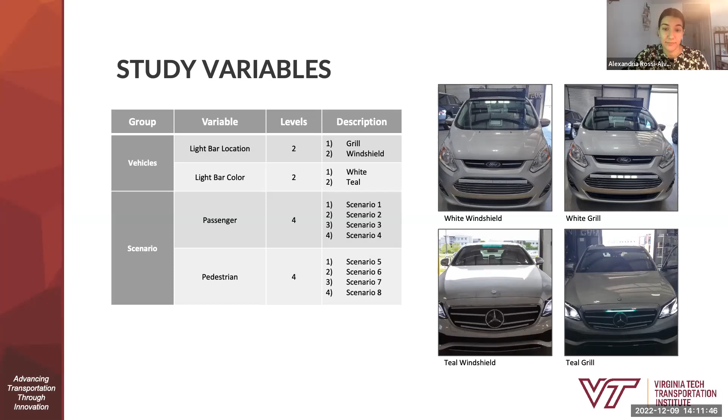So the study was conducted at the Smart Roads at VTTI. This is a closed test track research facility created in partnership with VTTI and VDOT. VTTI launched the Virginia Smart Roads, a suite of test tracks that enable advanced vehicle testing in a really comprehensive cross section of roadways. There are 4 major sections for the Smart Roads, which include a live roadway connector, the surface street, the highway, and the rural section.

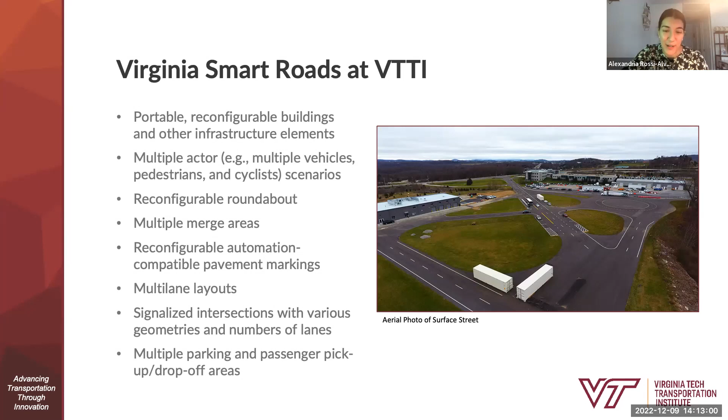We did a lot of training before we began collecting data, and we ran multiple pilots to ensure that the drivers were driving robotically and uniformly, practicing all of the testing scenarios that we were evaluating.

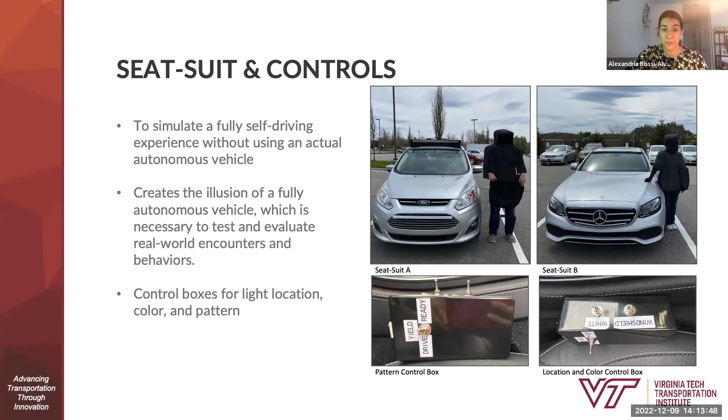We tested 3 light patterns that conveyed vehicle intention to the pedestrian.

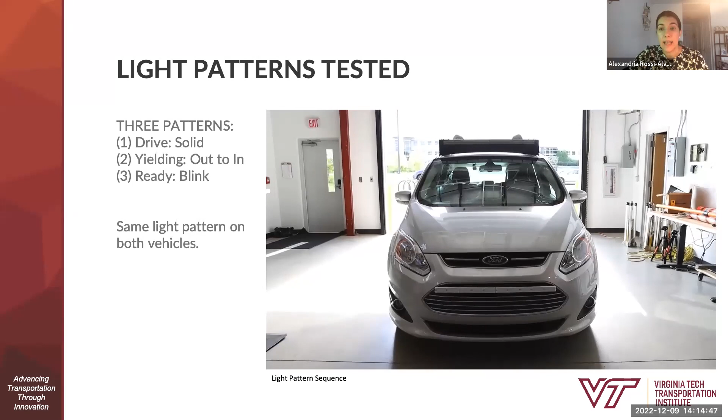So here, the vehicle is actively driving down the roadway. The out-to-in means the vehicle is actively braking or yielding. And the blink indicates that the vehicle was about to start driving again - it was ready.

Per the Virginia Tech IRB and VTTI Safety Committee, we could not have participants actually cross the street in front of the moving vehicles. So we utilized what we call our decision box. We set up a box outlined on the corner of the intersection, participants stood outside the box, and the moderator provided instructions.

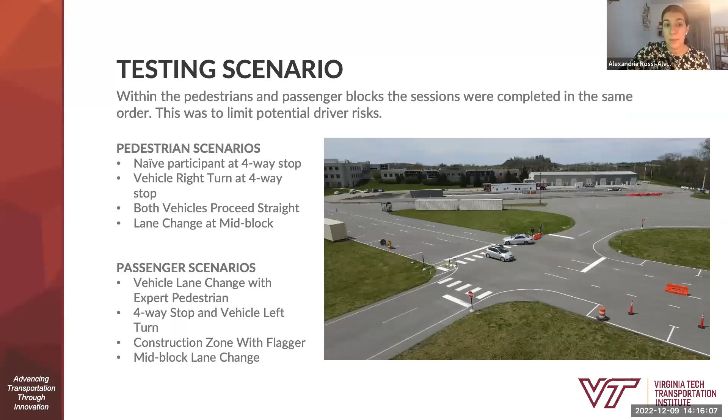We had 8 different testing scenarios. The first 4 were pedestrian scenarios, and the last 4 were passenger scenarios. The scenario groupings were counterbalanced to mitigate any order effects. I'm going to go through each scenario individually.

Our first scenario was a four-way stop where both vehicles came to the stop. Vehicle B approached the intersection first. Once the vehicles stopped, vehicle B proceeded straight through the intersection, then vehicle A. The vehicles did follow all normal traffic laws that are on the roadway today, and participants were instructed that the vehicles would follow normal traffic laws.

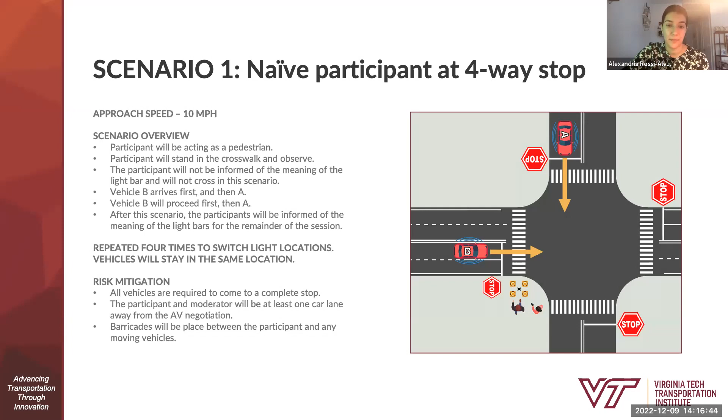Scenario 2 is our right-hand turn scenario, where the participant is on the other side of the road. Vehicle B is wrapping around and will make a right-hand turn in front of the participant. Then vehicle A will just drive straight through the intersection once they've completed their stop.

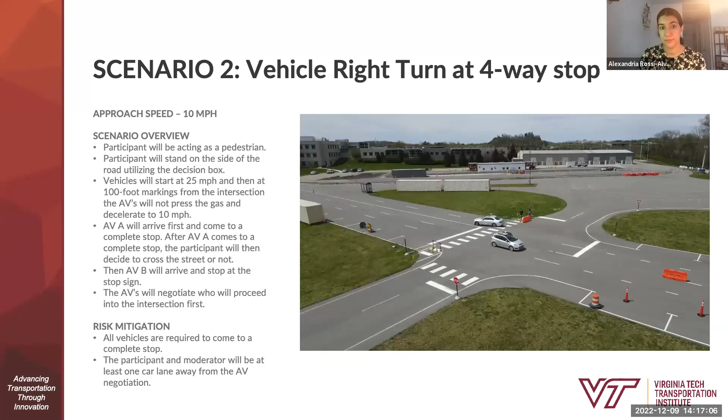Scenario 3, the participant is on the other side of the road. Both vehicles will approach the intersection, and then once they stop, they will just pass through the other lane.

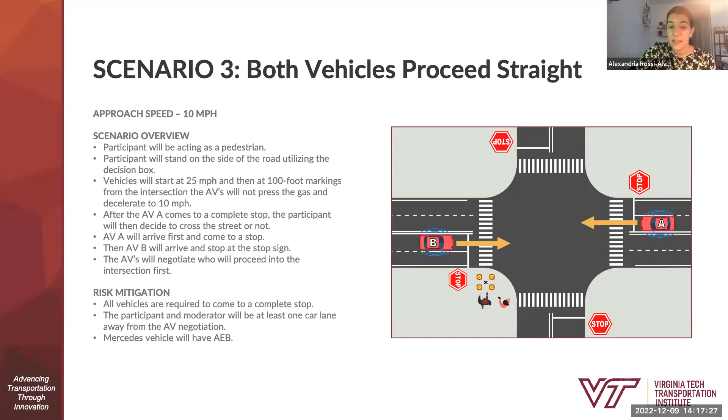Lastly, we're going to move to scenario 4. This was our last pedestrian scenario, and this was our high-speed scenario where we had both vehicles driving down the roadway at 35 miles an hour.

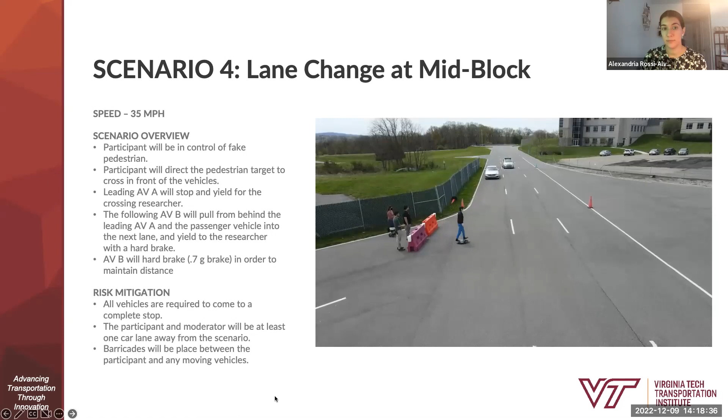So that concludes the 4 pedestrian scenarios. Now we're going to move to the passenger scenarios.

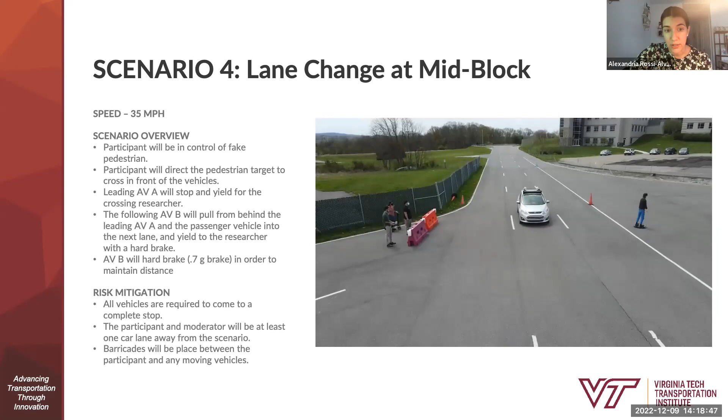For the passenger scenarios, we wanted to understand: do people notice and understand the EHMI from this different perspective? And how does that influence learning over time and their expectations of the external communication?

As participants sat in the vehicle, they talked aloud about what they saw happening with the vehicles and the external communication. Afterwards, they filled out a series of ratings, similar to the ratings they filled out after the pedestrian scenarios.

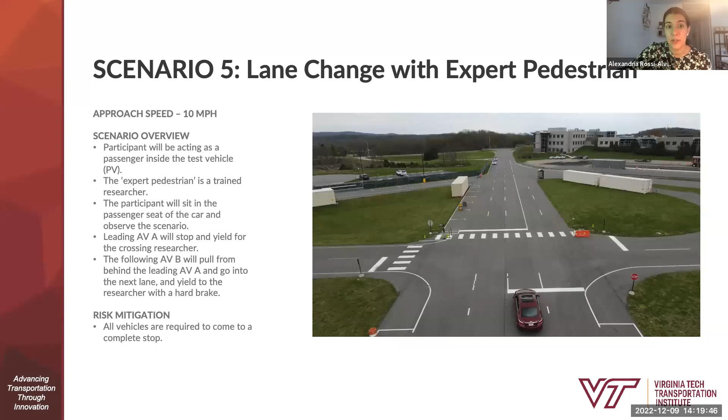This is our first passenger scenario. This includes our expert pedestrian, where our engineer will actually cross the street after the 2 vehicles approach the intersection and come to a complete stop.

Both vehicles are driving down the runway, approaching the intersection. They will come to a stop, and then we had our expert pedestrian cross, and then they will continue passing through the intersection.

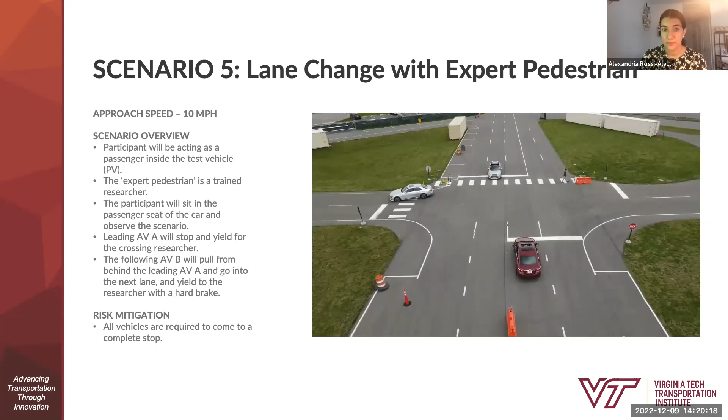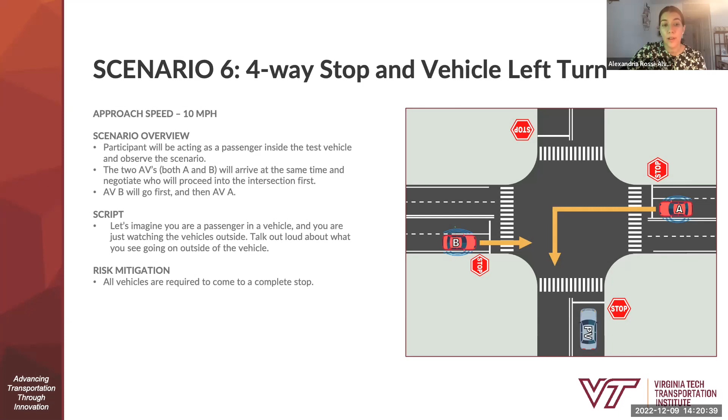Our next scenario was a left-hand turn in front of the participant, where both vehicles again approached that intersection. Vehicle B proceeded straight, and then vehicle A made that left-hand turn after vehicle B had exited the intersection.

Our third scenario was a construction zone. This was to understand what participants' expectations are when there is a close call and a pinch point. You're going to see here that there is one lane, the two lanes will turn to one, the vehicles will approach the intersection and both go at the same time, or almost the same time.

Vehicle B will stop for that yield, and vehicle A proceeds through straight, while the participant is sitting in this maroon vehicle watching this whole encounter, looking at the external communication and the vehicle's behavior, and talking through what they think is going on in these scenarios and if it matches their expectations.

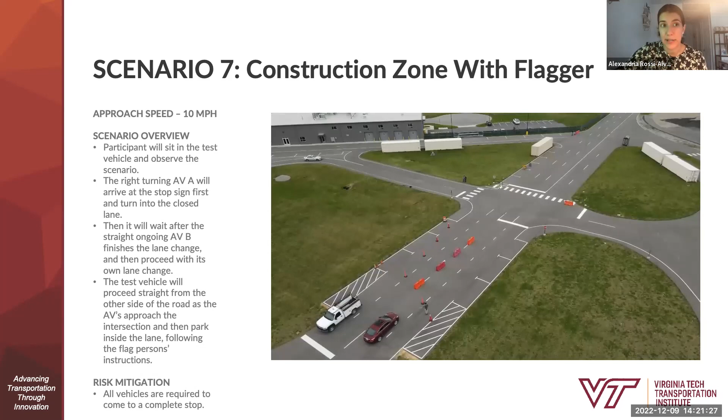And then lastly, I'm going to pause this one more time. This is our last passenger scenario, and this was actually our ride-along scenario. In this scenario, participants actually drove in between the two automated vehicles. In this experience, they were still talking about the external communication, which is mounted on the front of the vehicles.

Let me play this. So the participant is in the middle here, and then the three vehicles will begin driving in a procession down the runway towards the intersection.

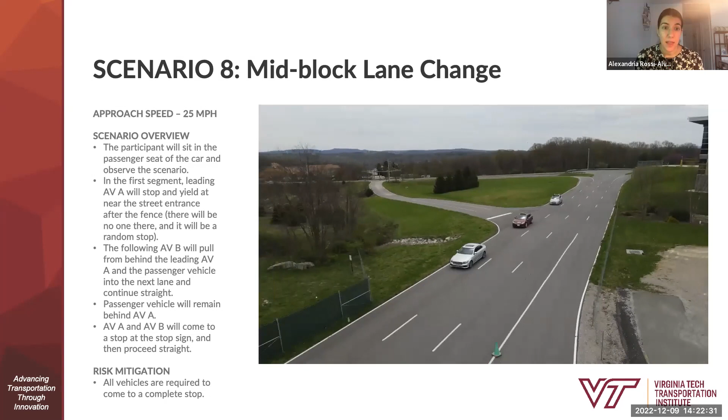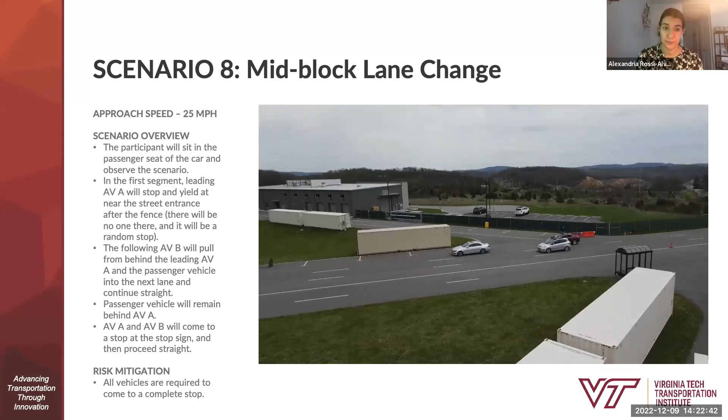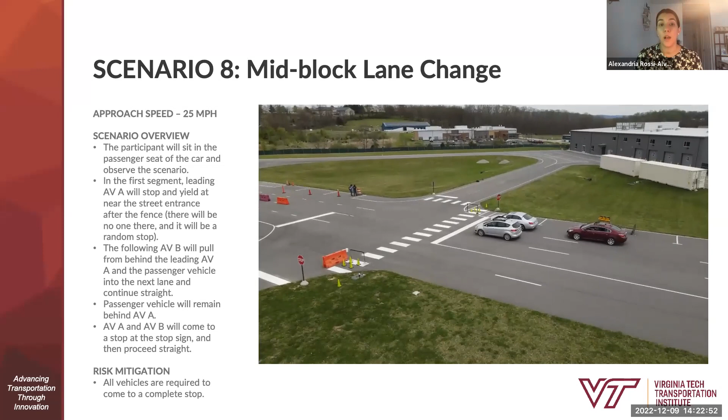All right, so next I'm going to dive into some of our results. And first, I'm going to start by looking at the crossing decision data by the specific scenarios.

Participants' willingness and unwillingness to cross was analyzed across the 8 different trials utilized in the decision box. I think I forgot to state this, but those 8 scenarios were repeated for multiple trials, so participants could have exposure to the different conditions we were testing. Participants had a total of 18 different exposures to the system throughout that testing session.

This is looking at those first three pedestrian scenarios where they were making those crossing decisions utilizing the box. The first scenario was repeated 4 times. One of those scenarios was a baseline where the systems were off, and then for every single other scenario, they were repeated 2 times.

The highest crossing frequency was for when there was one vehicle in their straight crossing path, trial 3 specifically, and for two vehicles in their straight crossing path at trial 2. However, the percentage of participants who were willing to cross the street was not statistically different across the trials.

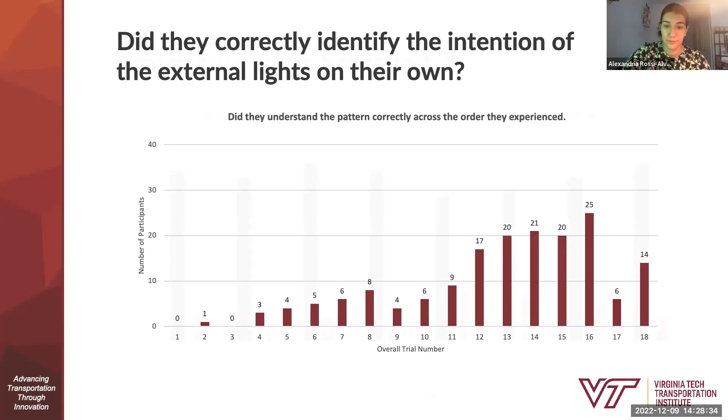Now we're going to move a little deeper into this crossing decision. For the first half of participants, they completed all of the pedestrian scenarios first, then the passenger scenarios. For the second half, they completed the passenger scenarios first, then the pedestrian scenarios. That's how we set up our counterbalance to address any order effects.